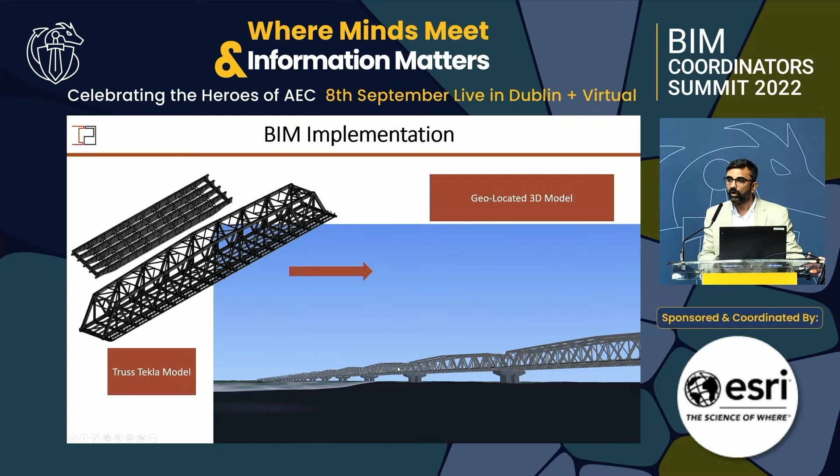Now the case study which I'm touching upon here is the longest steel bridge which was reconstructed. The superstructure, the deck portion, is broken. It is being demolished and reconstructed over the 6-kilometer span of River Ganga in Patna. So what we have done is we have created a complete 6-kilometer model of substructure and superstructure, with all the finishing items put together.

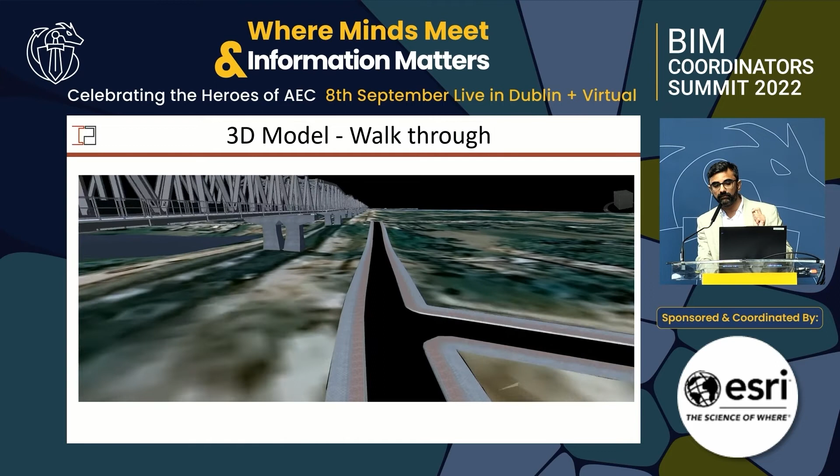You will see there's a quick walkthrough of the project. So this is exactly geo-referenced and kept on the location. The idea behind that was to utilize the same for the progress monitoring. I'll just take it a little bit ahead just to show you the detailing. So every element, the truss, is being mapped in Tekla. Every element of the bridge is being mapped, and you can see the topography and the existing structure across. So now this video will go for complete 6 kilometers, so I'll just skip this and go ahead. But the idea was every element of the bridge was mapped as per the design.

And then what extra or good thing we have done here is we have validated the construction methodology, that we say I'll do this, then I'll do this. This is the construction sequence. So there are two methods. There's a truss on this span, which was being developed node by node. There were 10 nodes in one span, which were fabricated in 5 factories, brought on the site, and then erected. And then the work was started. So this is one method, which I'll just quickly show in this video. You can see every node is being fabricated and erected at site. It will be represented in my next slide, where we are talking about 4D progress monitoring.

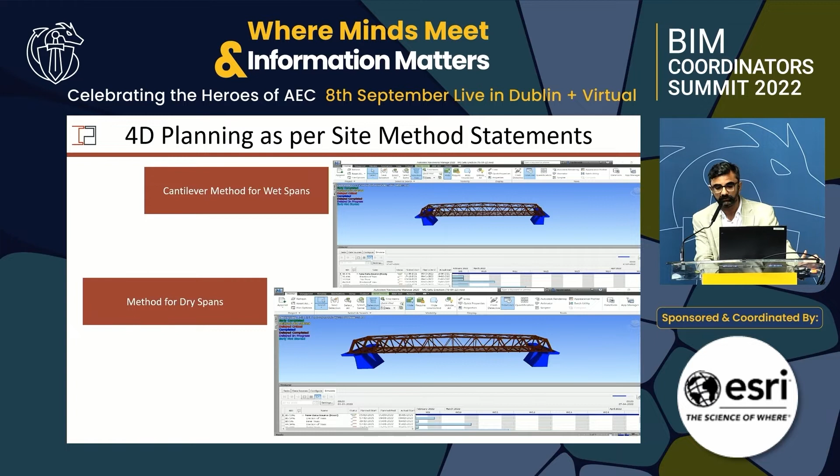And another method was the truss: bottom truss, inner and outer truss installation, and then top truss. Then one span is completed. Like this, we had more than 80 to 90 spans, more than 100 meters in length. Then we have also mapped the process of fabrication, delivery, and erection. This is the bottleneck for the project, and we have successfully completed this project on time because of mapping the various bottleneck processes. So if you see here, the green color is fabricated, the yellow one is delivered on site, checked, proof checked, and the purple color is erected on site. So this is what the whole philosophy is all about.

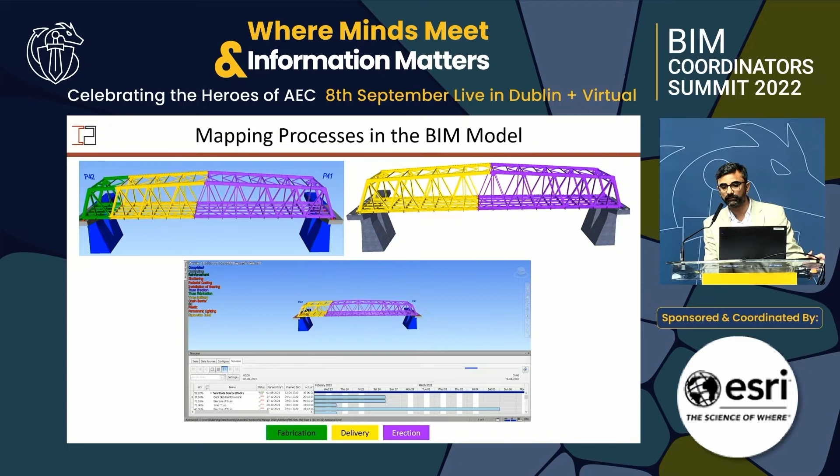So I'll just play the video, and you can see the color codes will represent whether that node is being fabricated and delivered. Yes, it is being done, and the erection has started. The same thing you will see in my next slide, where we are actually doing the progress monitoring. So now if you see here, this is the progress monitoring we used to do every week with the site team and the head office team to mitigate the delays. You will completely see the progress of the truss, which is delivered, which is fabricated and which is erected. For the deck portion, all the stages like shuttering, reinforcement, and concrete, you can see in different colors. So the complete bridge, you can see on your screen sitting in the office, what has happened there.

So I'll just quickly play that video. So this is the truss which is already erected. The crash barriers are done. Now if you see here, this footpath is erected. In one section of the bridge, the footpath was not being erected because deck casting was happening. So that was a bottleneck, or in the future, it could be a bottleneck.

So if you see here, the footpath was not installed, because the deck work is happening here, because shuttering is happening at this particular location. If I go a little bit ahead, now if you see, this way we were planning on site.

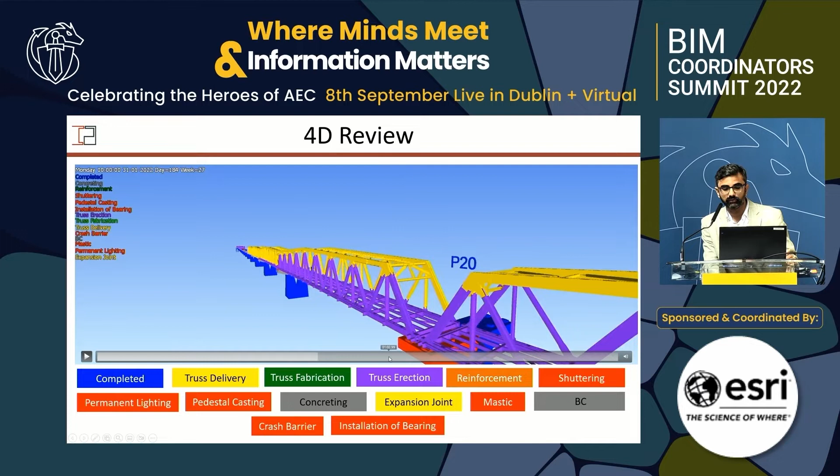What we used to do is, this is the inner deck, inner truss which is being erected. This is delivered on site, so I need not worry about delays because these are already being taken care of. I just have to focus on the site; resources are in place, erection will happen on its time. And if you go a little bit further, we had inventory management done through this as well. And if you see, I'll go a little bit ahead on this.

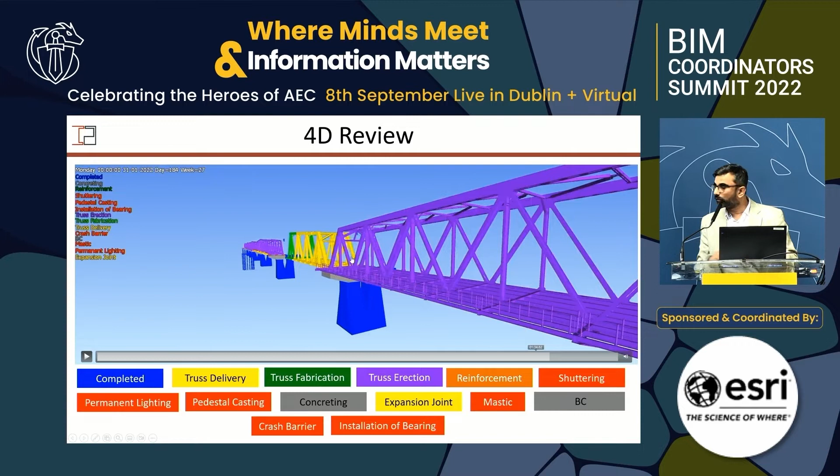If you see here, this span was a bottleneck. If I don't connect this span, my whole finishing team will not have continuity, and it is bound to delay my project. So what we have done, we have given up to that level exactly on site. This node was fabricated but not delivered. These nodes were fabricated and delivered on my site. So we were focusing on this kind of analysis along with site, and that's the reason we could achieve timely completion.

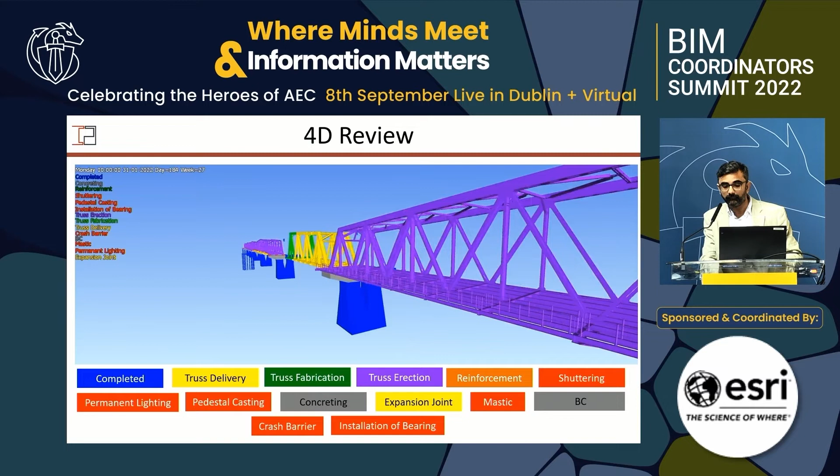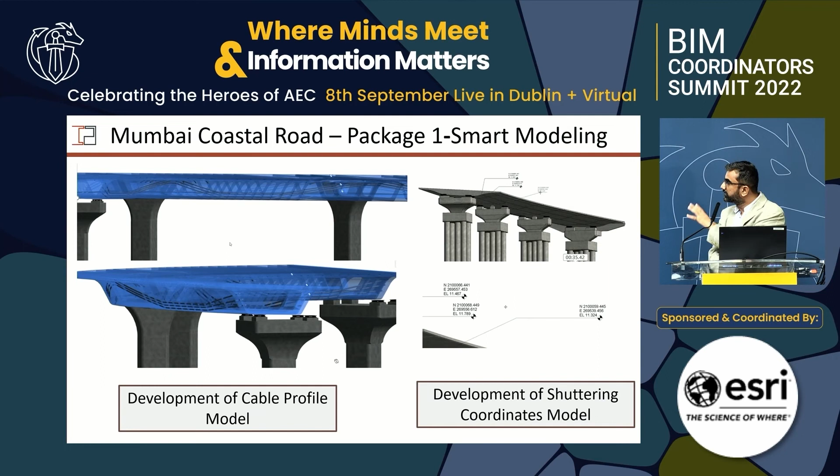Then this is the smart modeling which we have done in the bridges. The cables which are flowing in are being mapped, and those coordinates can be given to the site. So this reduces your overhead cost by at least a team of 6 people sitting on the site for 2 years. They are not required on the site because of this automation. Then I'll just skip this video. This is another, I'll just skip this also, and just show you this.

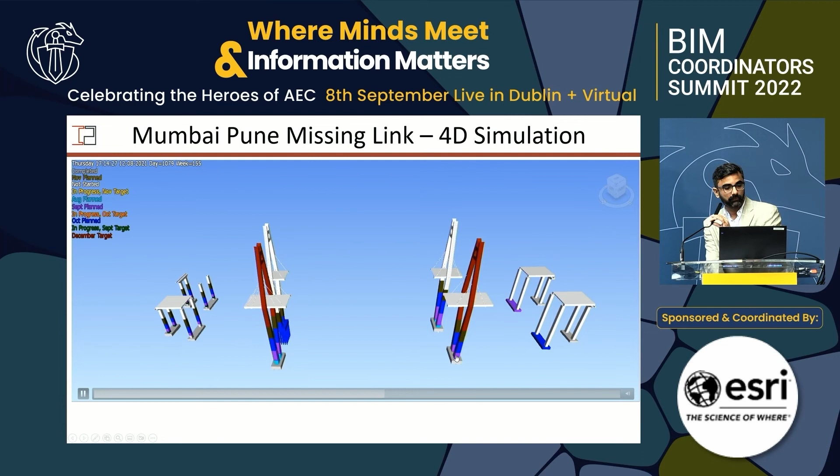This is a cable stay bridge. What we are giving here is, for September, October, November, and December, a 4 months look ahead through the model in different colors. So you can see this is a pylon, this is a cable stay bridge. This is going to happen in the month of September, which is planned. Then this is October, November, and this is the December part.

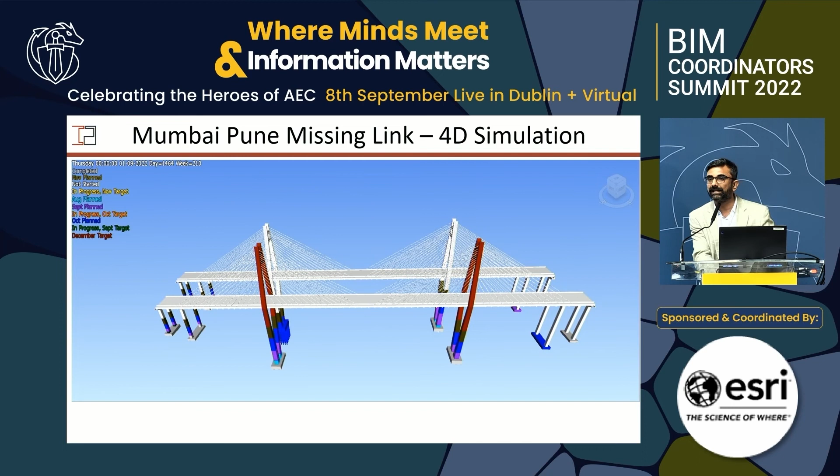So though everybody knows what's going to happen on this project, it's a cable stay bridge which we are doing in India. Multiple cable stay bridges are coming in. So we are using this kind of a model to interact with the site for better clarity, trying to take out the complete Primavera kind of stuff.